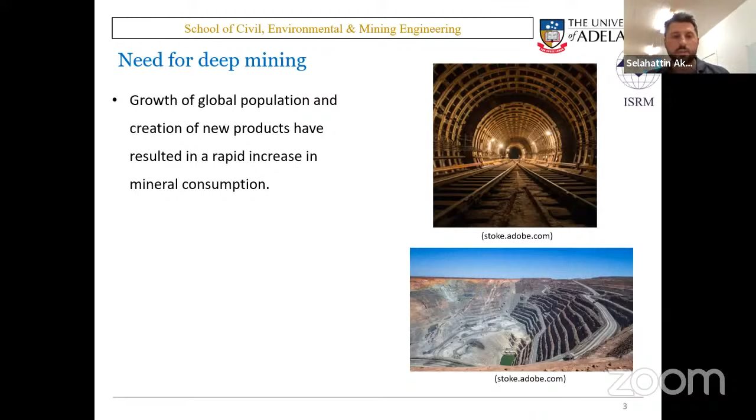First, I would love to give you a brief introduction to the need for deep mining. As we all know, resource consumption is increasing rapidly due to the growth of the global population and new products and markets. This has caused the global demand for minerals to increase exponentially, leading to a decline of ore grades, and consequently mining volumes are progressively increasing, and underground mining continues to progress to greater depths to sustain the supply for the growing demand.

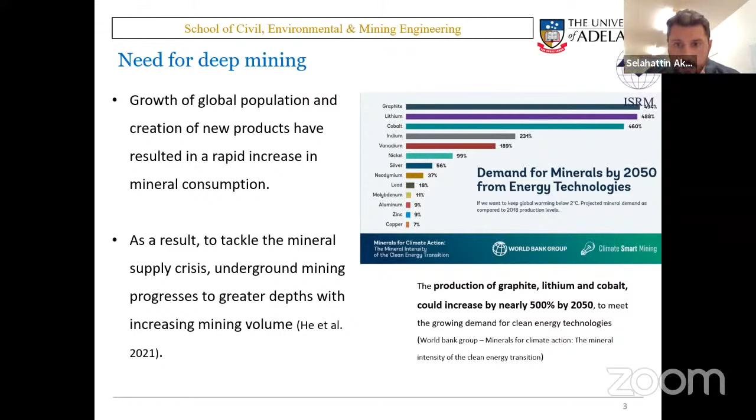Rock burst, which can be considered the cancer of deep rock engineering, can be defined as a large volume of ejected rock fragments caused by the instantaneous release of accumulated excess strain energy from highly stressed surrounding rocks in deep underground or highly buried excavations.

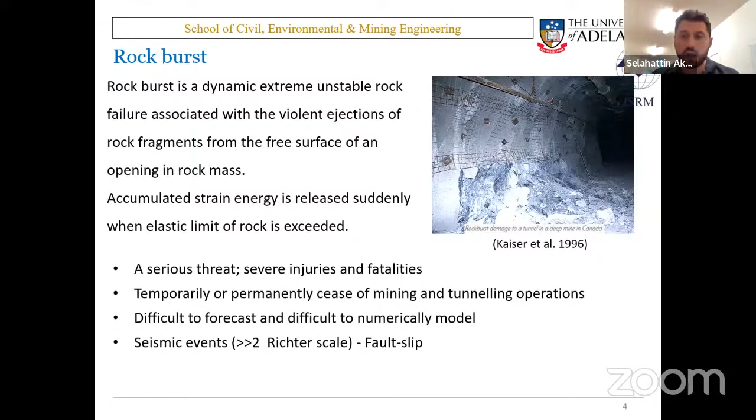This phenomenon causes significant risk in underground operations and could potentially lead to personal casualties and equipment damage, and could also lead to some delay in excavation operations. It could also trigger microseismic events of magnitude more than 2 on the Richter scale. So it's been one of the most serious and yet least understood problems in deep mining and tunneling operations.

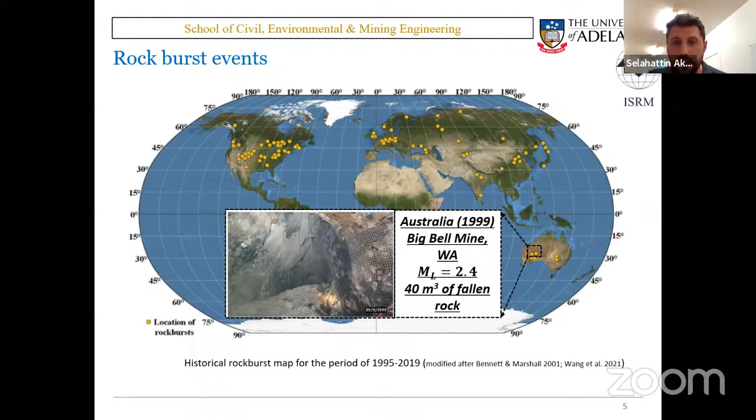Rock bursts have been occurring worldwide, and numerous rock burst events have been recorded in the past decade. Here's an example from WA in Australia: in 1999, in one of the gold mines in WA, a rock burst occurred, and 40 cubic meters of rock had fallen during that incident, along with a quite large microseismic event.

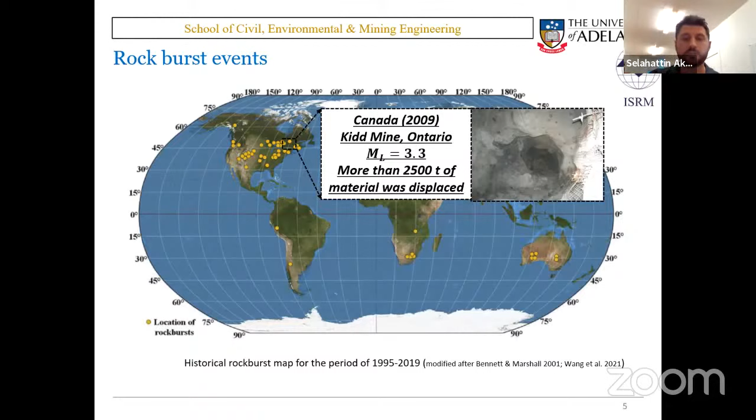Another example from Canada in 2009, from a copper and zinc mine in Ontario, where another seismic event got triggered by the rock burst, and more than 2,500 tons of material was displaced. Another example from a coal mine in China, where a huge amount of energy was released during the burst, and unfortunately 5 casualties happened by the end of this accident.

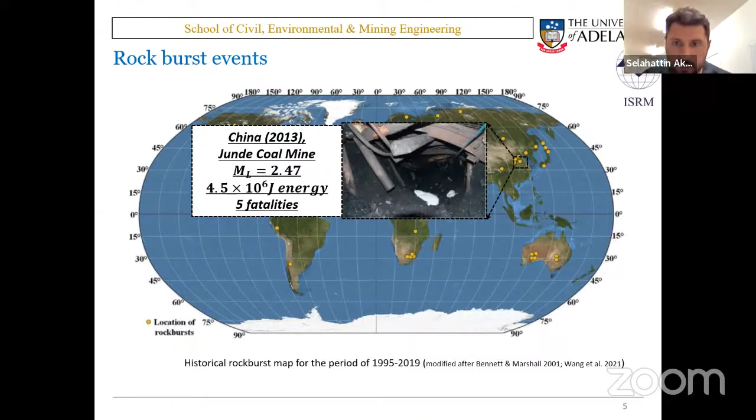Just to visualize how a rock burst occurs in underground or highly stressed mining excavations or highly buried tunnels, I would like to show you two short videos of rock bursts. It might be quite loud.

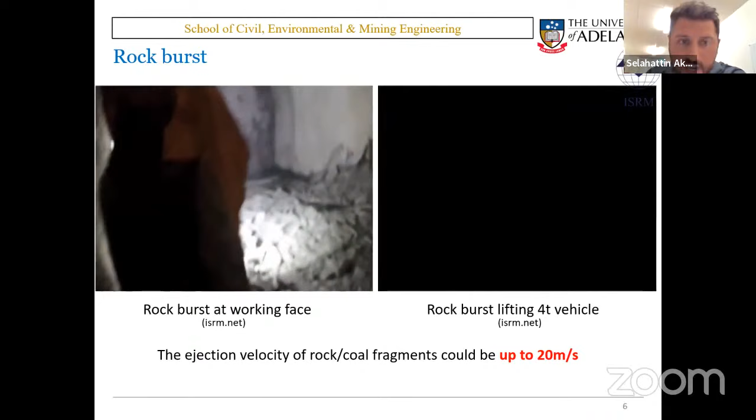As you can see from a working face, the rock fragments ejected from the working face instantaneously at a certain speed, which, to be honest, looks quite scary. Another example from a working face in an underground tunnel: the workers were not aware of what was going to happen, and it ended up lifting a very heavy vehicle in the tunnel, but luckily no casualties happened in that one.

Rock bursts are quite dangerous dynamic incidents, and the ejection velocity of the fragments from the free face, from the working face or sidewalls, could go up to 20 meters per second. So the underlying mechanism of it should be understood very well.

So far, lots of studies have been carried out in the physical simulation of rock bursts in laboratories by replicating the phenomenon under uniaxial and triaxial loading or unloading conditions, and a substantial understanding of rock burst behavior has been gained through these studies, as well as field observations.

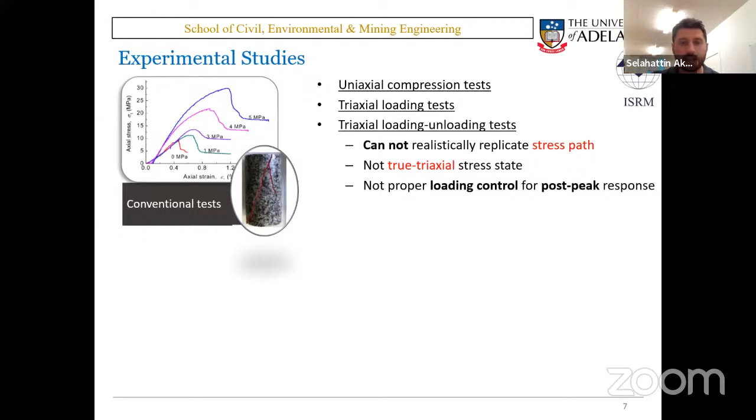However, there are still some outstanding issues that need to be addressed and clarified in the mechanics of rock bursts. The excavation of deep high stress rock masses will inevitably cause unloading, affecting the mechanical properties and energy storage characteristics of the rock. Therefore, excavation unloading is an essential factor to study in rock bursts in deep underground engineering.

For this, some big, expensive true-triaxial rock burst testing frames have been developed in the last decade, replicating the stress paths in an underground excavation by introducing a sudden release of the minimum principal stress, mimicking a free face or an excavation underground.

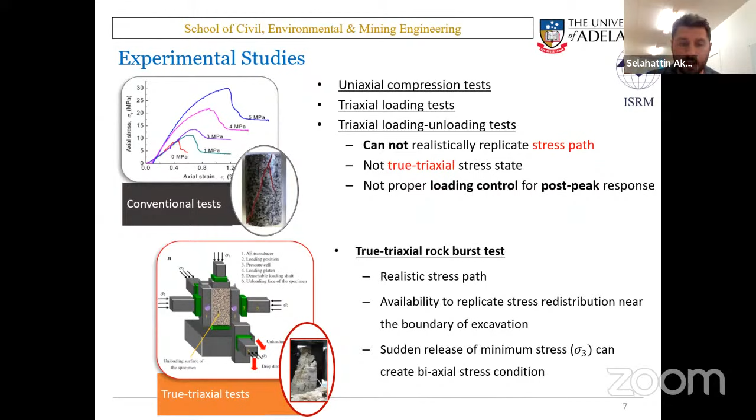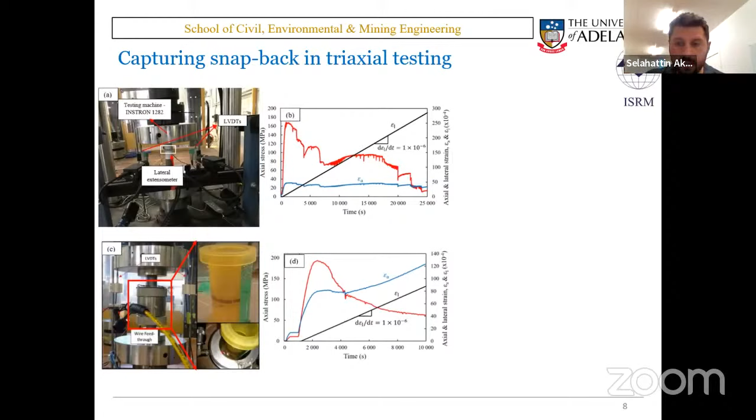In order to better understand and determine the excess strain energy characteristics, which can be defined as the potential energy for rock burst, here in Adelaide we have conducted a series of lateral strain control uniaxial and triaxial compression tests, and the snapback behavior of thermally treated granite samples has been obtained by these tests.

According to the results, a delay in the bursting was observed at higher temperatures, and the samples also tended to burst in a more intense manner as a result of the thermally induced microfractures.

Confinement has also been observed to have a significant influence on the post-peak energy characteristics, so more severe bursting was observed with increasing confining pressures.

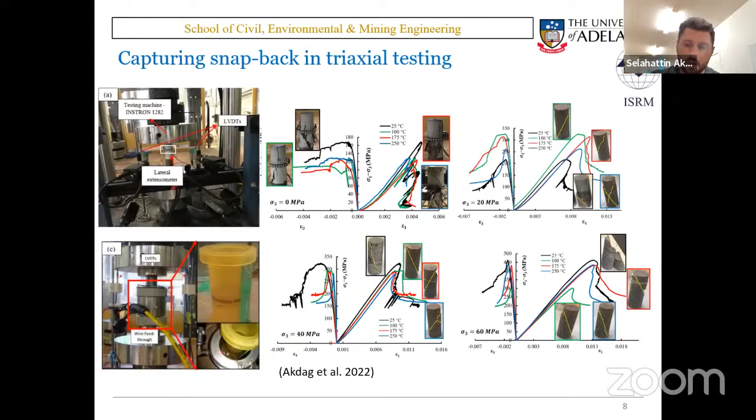For rock burst, a prerequisite is that excess strain energy exists to eject material fragments after failure. So when the elastic strain energy in the rock exceeds the rock's storage capacity, a certain amount of energy mainly dissipates by rock fracturing, and the remaining part of energy is mainly used as kinetic energy of the rock fragments during bursting.

In other words, rock fracture may not be able to dissipate the entire potential strain energy, and a portion of it is transferred into kinetic energy to eject the rock fragments, which leads to the occurrence of rock burst.

So we have done some energy analysis after those tests and determined the excess strain energies. This is important because in order to eliminate rock ejection underground, it is really required that the energy absorption of the dynamic support system used in tunnels or mining excavations must be greater than the excess strain energy of the rock.

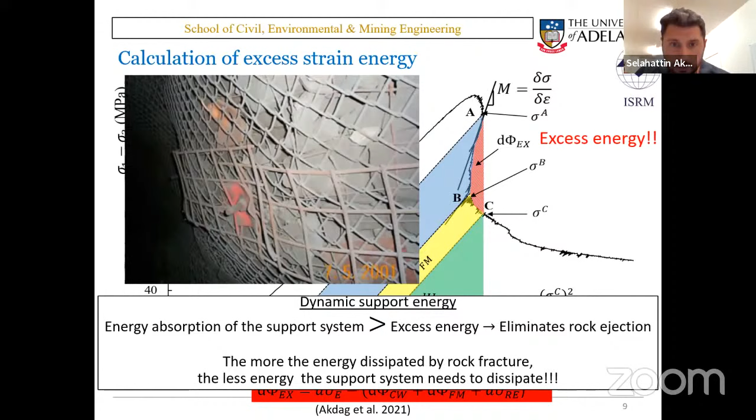This work was conducted in 2018, and we used the true-triaxial loading bursting testing system there to do some rock burst tests using granite.

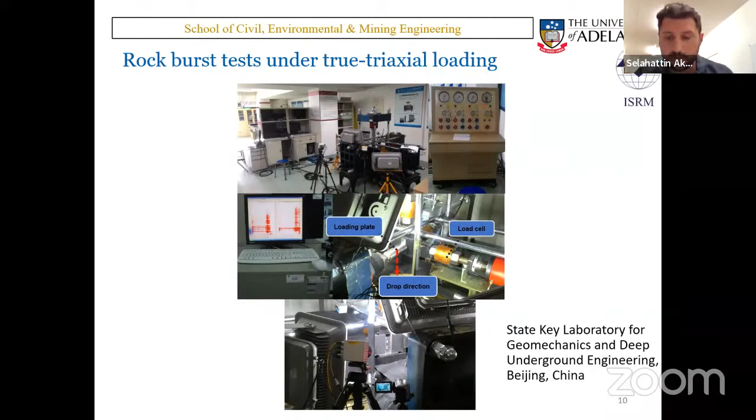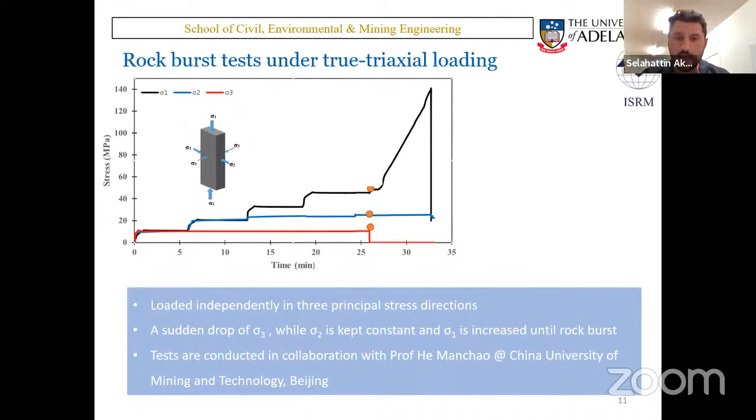To illustrate how the test happens in such a big testing frame: a rectangular sample is loaded independently in three principal stress directions up to a predetermined in-situ stress level. When that stress level is reached, the loading in the minor principal stress direction is dropped, creating a free surface on the sample, while keeping the intermediate principal stress constant and increasing the major principal stress until bursting occurs.

These tests were conducted in collaboration with Professor He Manchao, who is a very well-known rock burst expert in the rock mechanics area. Here's an example of the ejecting fragments from the free face of a rectangular sample.

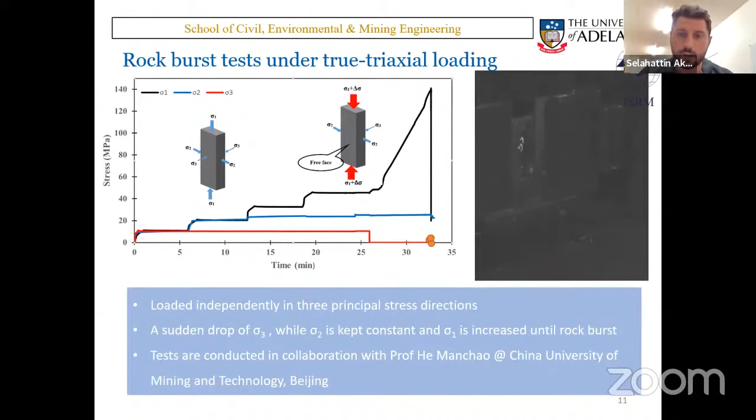As you can see, it started with small grains ejecting from the free face with increasing axial load, and it failed after the capacity was exceeded.

Using this testing frame, we studied the thermal damage influence on bursting mechanism under true-triaxial loading and unloading conditions. Based on the stress level and the kinetic energy calculated via high-speed cameras and the acoustic emission responses and their characteristics, the damage state of bursting was identified both qualitatively and quantitatively.

This is an example of capturing the ejecting fragments from the free face.

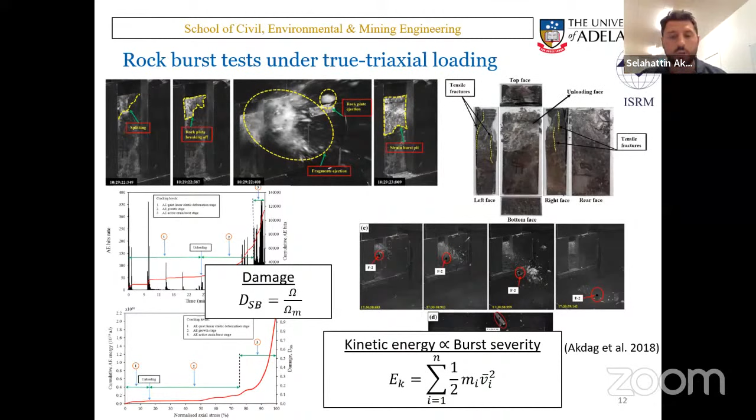In this study, some bursting indicators have also been proposed to evaluate the degradation of the rock and the bursting processes, and the bursting severity was quantified by the kinetic energy of the ejected rock fragments.

As an alternative to these big expensive testing frames, here in Adelaide we have proposed a burst testing methodology using hollow cylinder samples. In this methodology, we could also mimic the stress states in an underground excavation by applying internal confinement, external confinement, and axial loading, which enables us to replicate the three principal stress states.

In order to verify this, we used acoustic emission responses during these true-triaxial tests using hollow cylinders as well. We tracked the deformation and bursting processes during the tests, and to verify the acoustic emission responses we implemented a borescope to confirm the results during the tests.

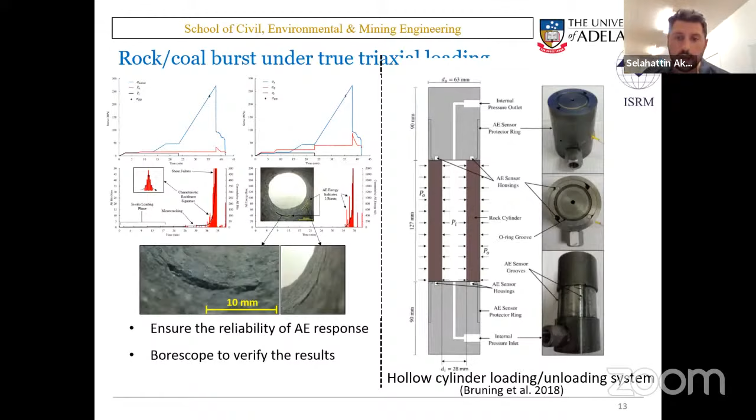During the test we can observe bursting, which relates to the acoustic emission response and follows the force-displacement response at the same instant.

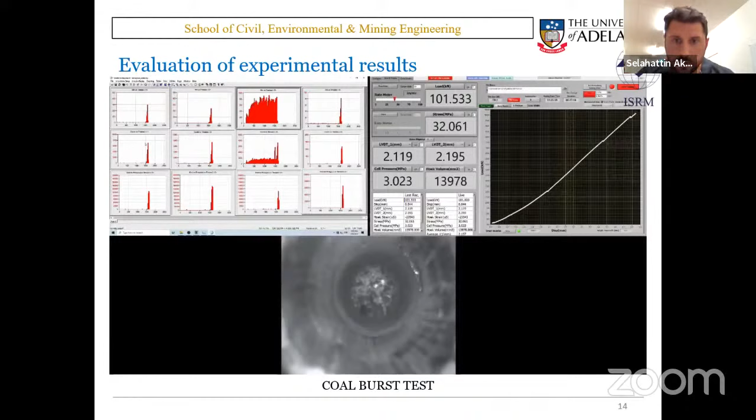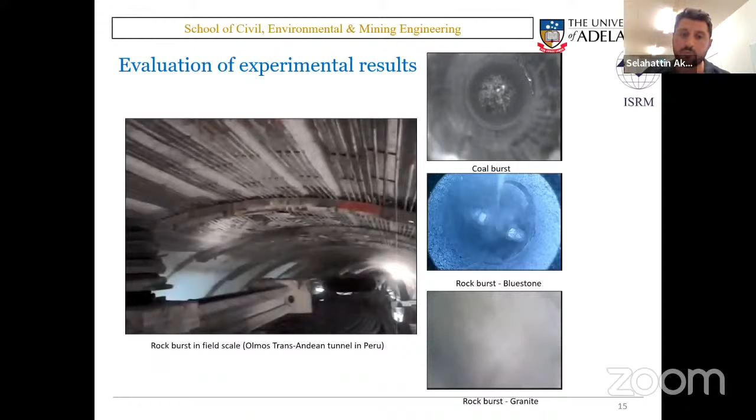A bursting happened here, and now the granite is bursting. We can observe the crack generation and propagation in the hollow samples and the bursting at the same time, showing that this bursting phenomenon can be replicated in the laboratory as well.

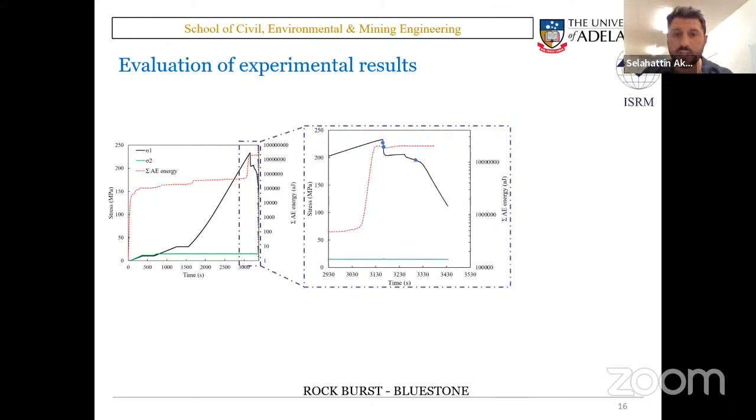As an example of bursting in bluestone, we obtained the stress-strain behavior and also the acoustic emission responses to detect any kind of deformation and the evolution of the failure and bursting.

The evolution of rock burst showed local grain ejection from the sidewalls of the hollow cylinder, followed by fragment exfoliation accompanied by crack generation and propagation, and eventually bursting occurred when we increased the major principal stress level.

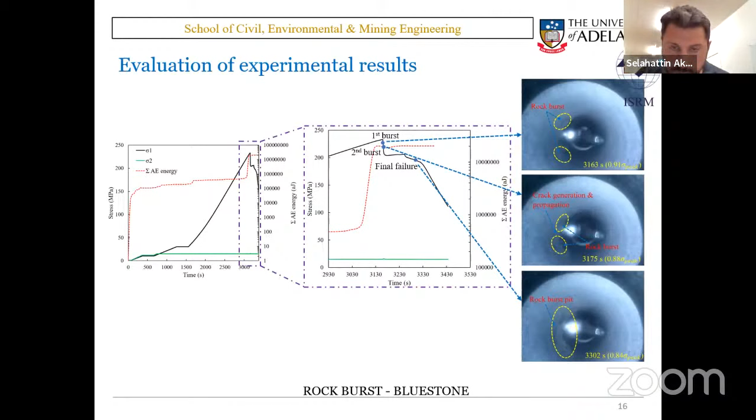So in order to quantify the damage, we have also conducted some micro CT scanning before and after each bursting test to provide a non-destructive 3D imaging of the fracture evolution and fracture network during bursting. So a stack of 2D X-ray images was reconstructed to produce a realistic 3D virtual volume, where each voxel represents the X-ray absorption at that point.

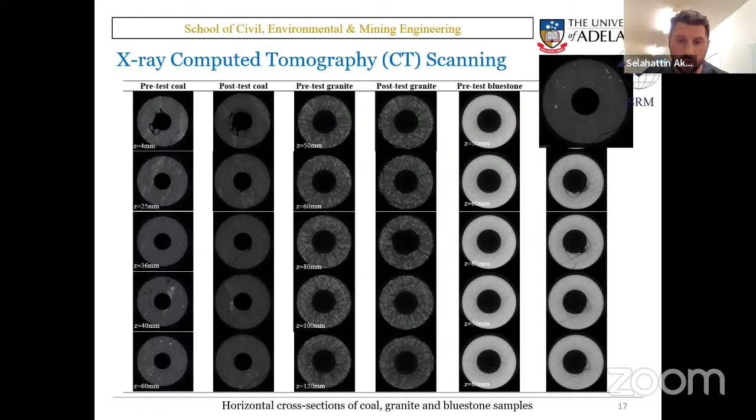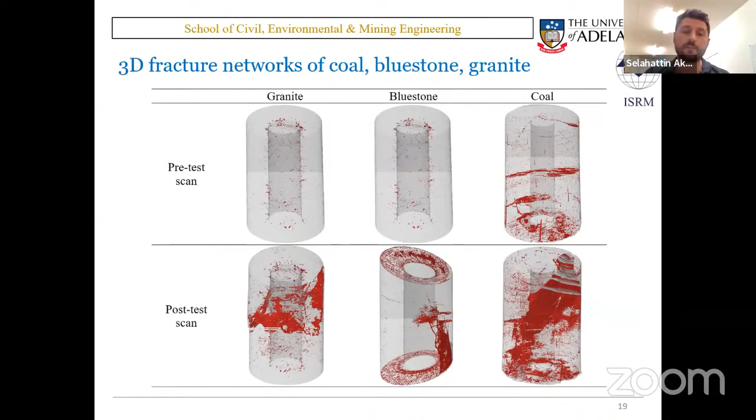Using the 2D stacks of images, we have reconstructed the 3D networks of the fractures during the bursting tests.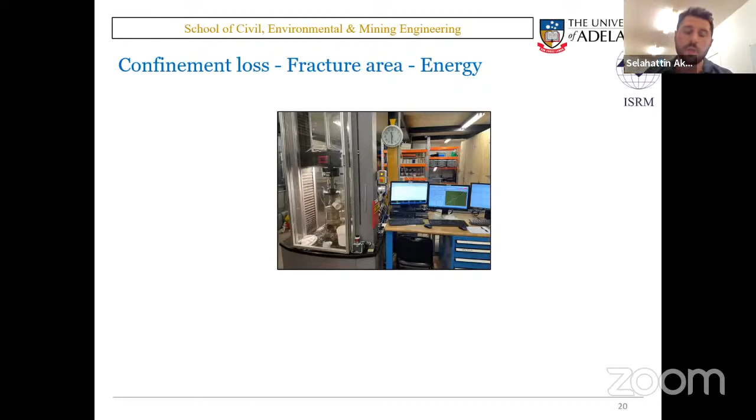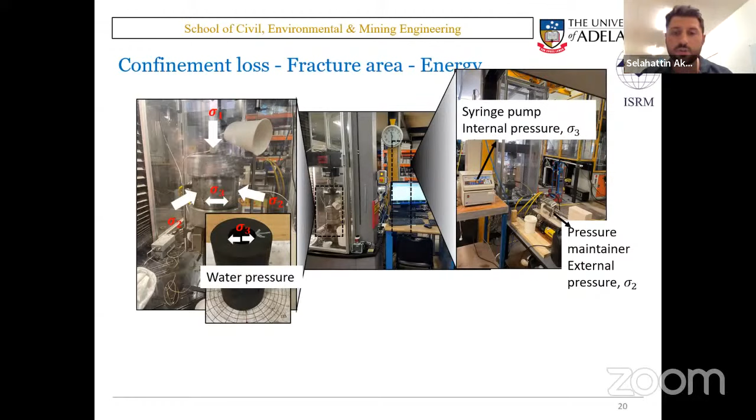We have also studied the influence of confinement level on bursting. In this case, a hoek cell is used for the external confinement, and water pressure is applied as an internal confinement using a syringe pump, with an MTS compression machine used for the axial loading to apply true-triaxial loading and unloading conditions.

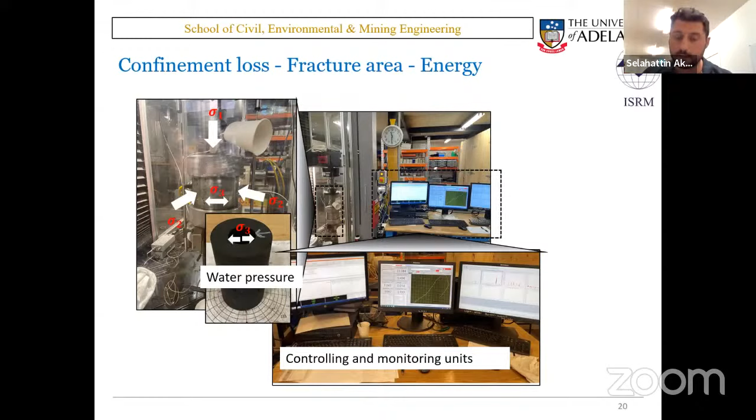In the meantime, during tests, we monitored the failure process using acoustic emission and force-displacement behaviors. Based on that, we released the confinement by removing the internal pressure from the hollow cylinder using the syringe pump. So we replicated an excavation in the laboratory by releasing the internal pressure in a hollow cylinder.

Here's an example of the bursting pits on a hollow sample. We then did micro CT scanning to determine the fracture surface area of these samples generated during bursting. Because we know the fracture energy of the sample, using the fracture area generated, we can calculate dissipated energy during fracture.

This happens by generating new fractures and also expanding the pre-existing fractures during bursting. We can also determine the kinetic energy dissipated rather than the fracturing mechanism during bursting, which is directly related to the bursting severity.

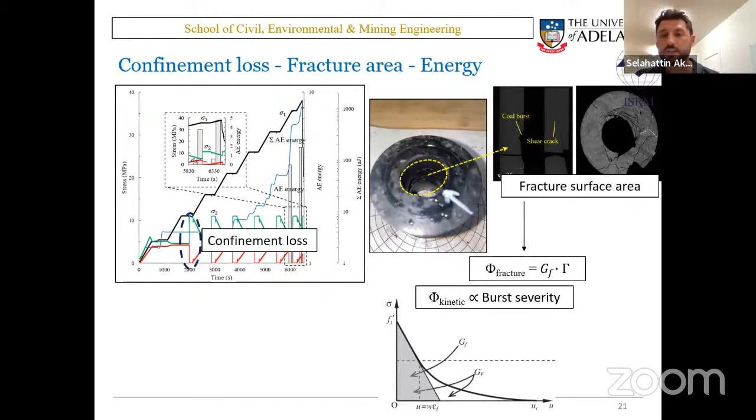We've also worked to understand, because the initiation of bursting is a quasi-static fracturing, the underlying fracturing mechanism of bursting by doing some fracture toughness tests under various strain rates and also temperature levels.

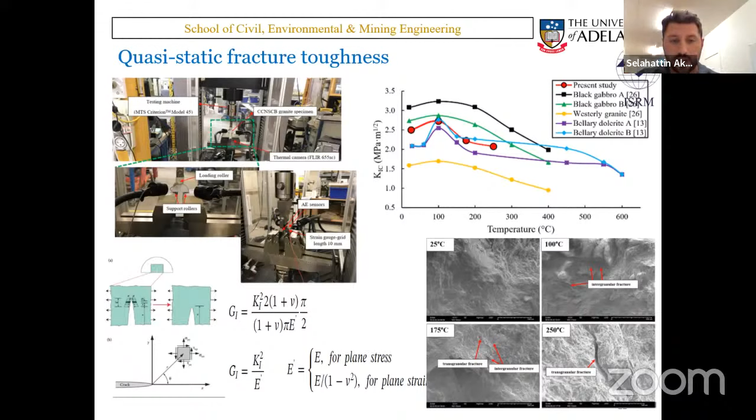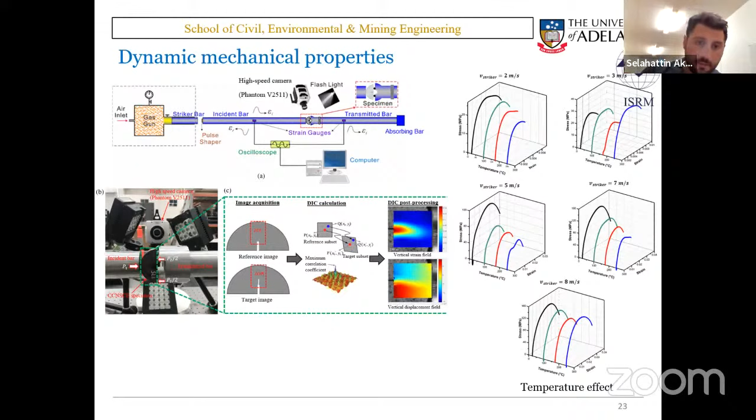Because we've also investigated the dynamic fracturing characteristics of bursting, as it evolves as a dynamic fracturing phenomenon, the effects of thermal damage and impact loads on the dynamic fracturing and energy characteristics have been determined by conducting these dynamic fracture tests using a split Hopkinson pressure bar at Monash University, in collaboration with Jian Zhao, who is a very well-known expert in dynamic fracturing.

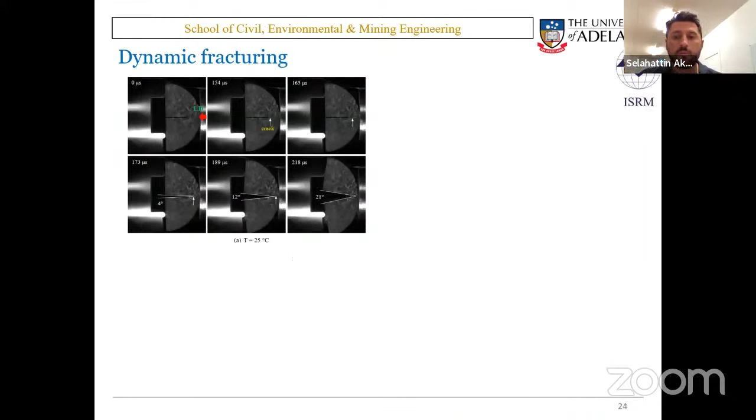With the help of a high-speed camera and DIC technique, virtual extensometers were designed, and displacement as well as strain fields have been obtained, and also crack propagation velocities were estimated using these, which are also used for dynamic fracture energy calculations.

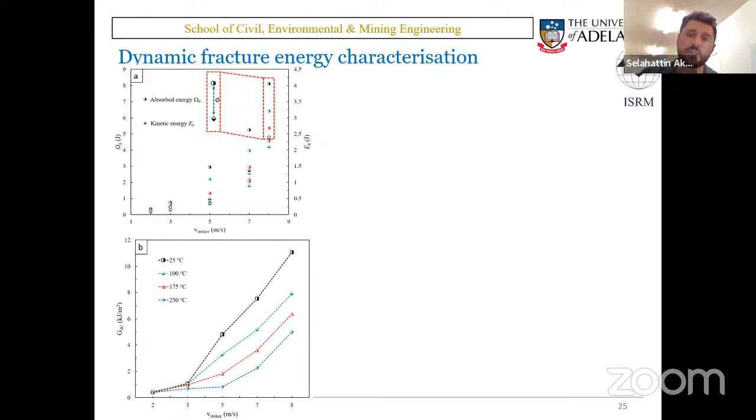The dynamic energy evolution characteristics have been determined and used to evaluate the bursting severity of granite under different impact loads. The bursting severity was determined based on the speed of the flying fragments during the testing.

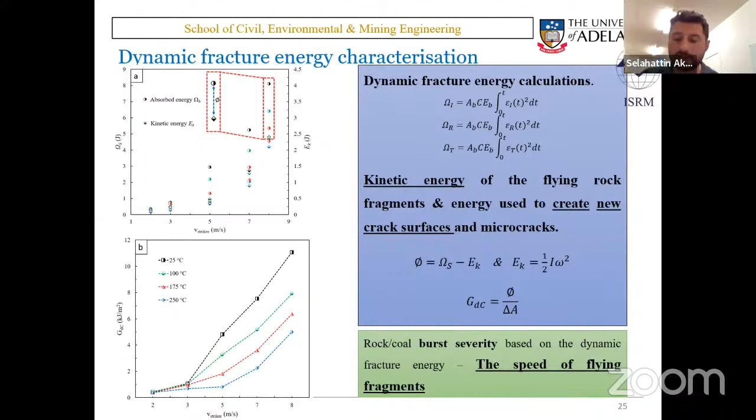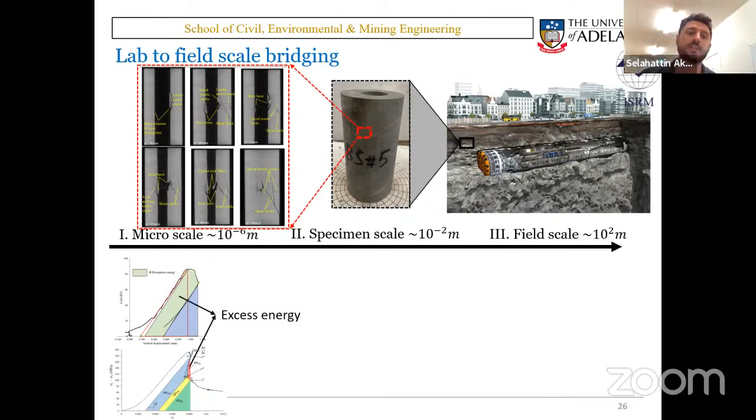It's really important to understand the behavior of the rock in the laboratory, so we can relate that behavior and try to estimate how it would respond in the field. By determining the excess energies and the kinetic energy levels, they can be used for the designs of dynamic rock supporting in underground excavations to eliminate the risk of bursting.

To summarize, in the laboratory, by conducting uniaxial and triaxial testing, we can determine the excess strain energy, which is the potential for bursting, as well as the mechanical properties. And by conducting some true-triaxial testing, we can determine the energy storage levels, kinetic energy levels, and also bursting stress levels based on the three principal stress levels.

The burst-prone depth could also be estimated based on the results of that kind of testing. And we can obtain some insight on the quasi-static and dynamic fracturing by conducting fracture toughness tests, as well as measuring the ejection velocity and the propagation velocity of the fracturing during these tests.

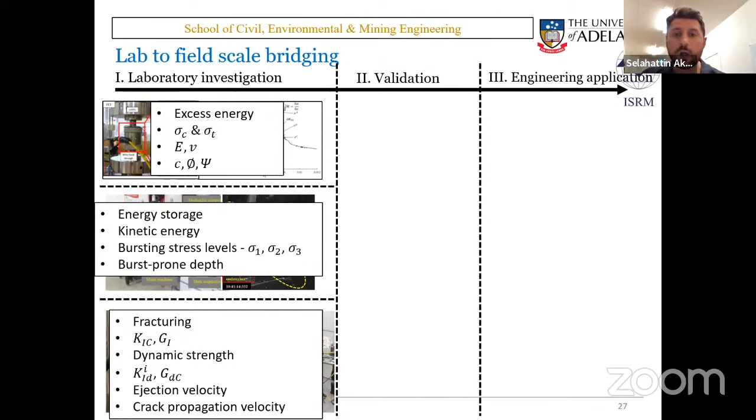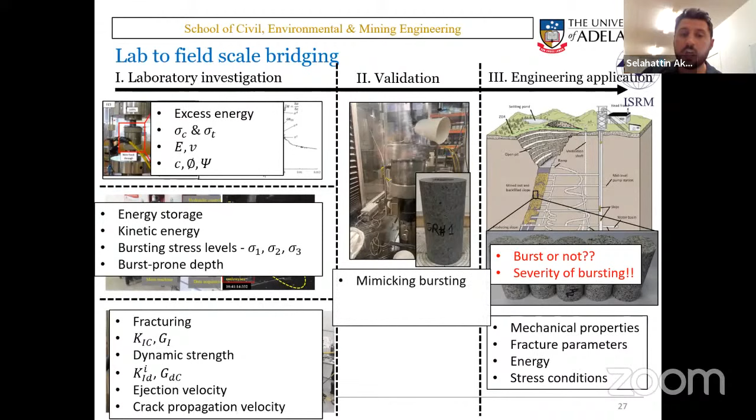So at the end of it, apart from obtaining mechanical properties, fracture parameters and energy levels, and also the stress conditions for bursting, we can determine whether the rock is going to burst or not, and estimate the propensity or severity of the bursting. In order to validate and verify the results, with an advanced true-triaxial loading and unloading setup, we can mimic the bursting in the laboratory and visualize the fracturing in 3D to better understand the behavior in the field.

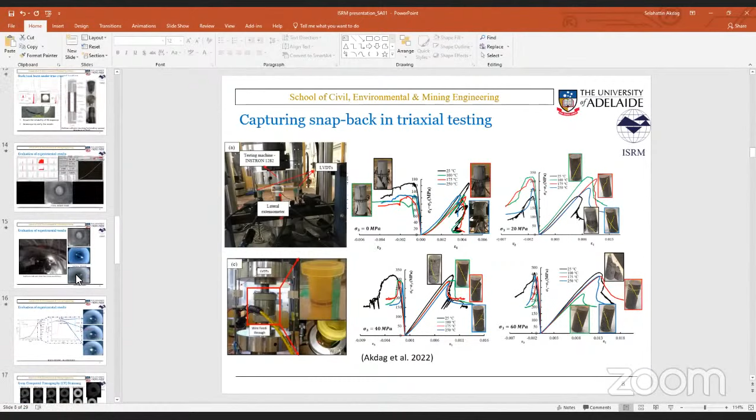There was a paper recently published, I think by Professor Ming Cai, Professor Xia-Ting Feng, and another gentleman, the first author Dr. Hu, I believe, about post-peak stress strain curves, and they very nicely explained the mechanism there. So I was wondering what type of method you use for controlling these tests, axial strain or lateral strain rate control, and how do you find this influencing the results based on your experience, if you tried that? Thank you very much.

Yeah, thank you, Masood, for your great, interesting question. As you said, some researchers use axial strain, displacement or load control, while others use lateral strain control, as we did here in Adelaide.

The main purpose was because we believe that rock behavior, especially brittle rock behavior, the axial strain does not increase at a certain steady behavior. That was the reason we wanted to use lateral expansion as a controlling feedback for the axial load, because the lateral strain, the expansion, increases progressively. We believe this is the real behavior of the rock, and it enables us to do the snapback here, so we can calculate the energy accumulated inside the rock sample, which is the potential of bursting that we propose here.

And so this energy will be released in case of a release of confinement or any free face that can be replicated in the laboratory.

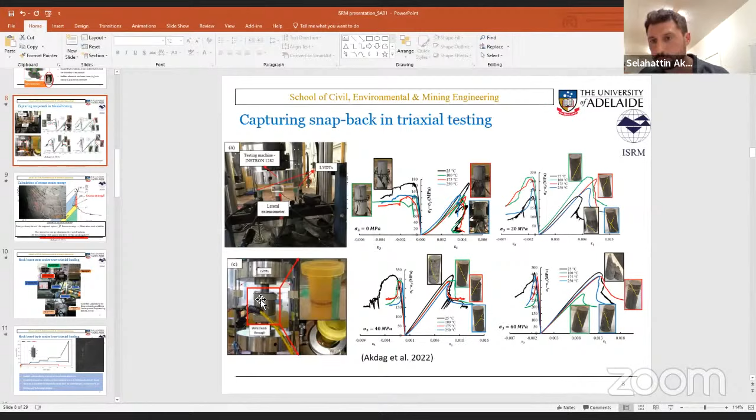Thank you very much. Very, very complete answer. Thank you, I really appreciate that.

So, based on my experience, I saw that on the lateral side we get unloading as well. When the lateral strain rate is high, the actuator moves back, causing unloading. So what we see is not actually class 2, it's just unloading, and you see that on the lateral strain graph as well.

So the behavior of rock is something that is changing in one sense, and in another it's not. It should not change with the way we treat the sample in the laboratory, based on machine rigidity or the way we control the test. It's just the way it responds to how we test it. On the lateral side, I see that we get unloading, and that unloading is elastic, not the plastic deformation or damage kind of deformation we want to see.

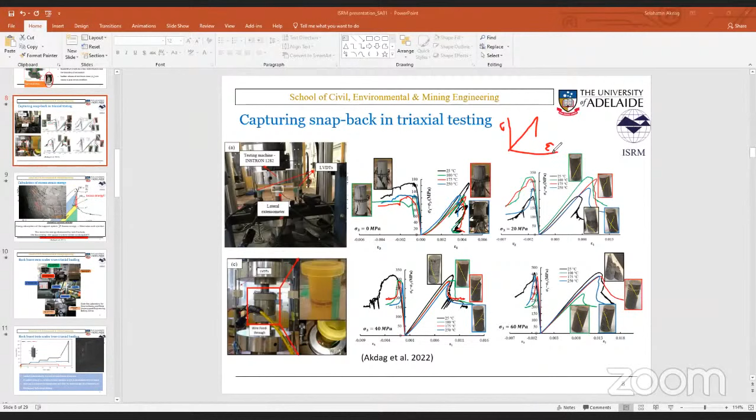If we control it with axial strain, though, we usually tend to get a very sharp release of energy, and there's no kind of kickback in the axial strain curve. That was the actual reason, because in axial loading control, the brittle failure occurs instantaneously and drops here, and that would not enable us to calculate the energy levels in the post-peak regime.

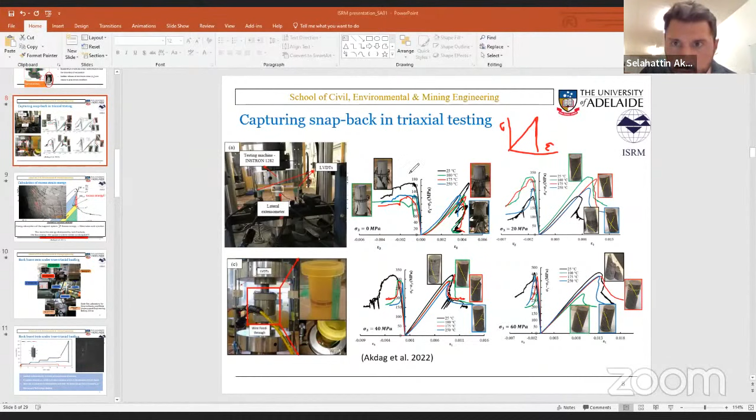So in this case, we are just getting the feedback. The rock itself is controlling this and releasing, as you can see here, in the next slide, which is more clear.

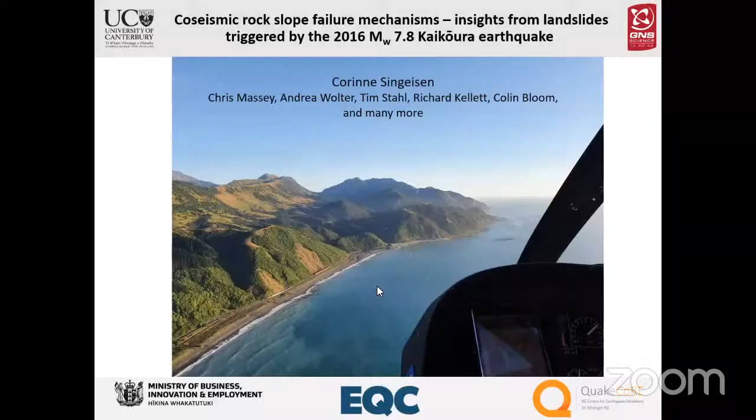Today I'll be talking about co-seismic rock slope failure mechanisms from the 2016 Kaikoura earthquake. The research I'll be presenting is part of my PhD research at the University of Canterbury under the supervision of Chris Massey and Andrea Wolter at GNS Science, and Tim Stahl at the University of Canterbury, as well as in collaboration with numerous other researchers.

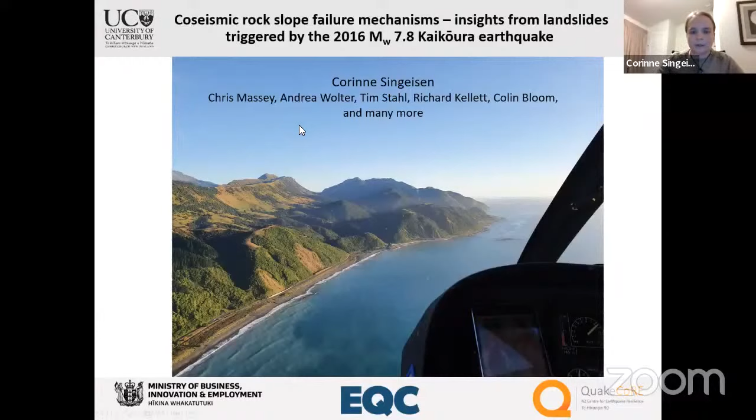First, I'll give an overview of the 2016 Kaikoura earthquake. Then I'll talk about co-seismic rock slope failure mechanisms, and then in more detail about site-specific analysis of two co-seismic landslides we studied. After that, I'll talk about the conceptual models of failure mechanisms derived from this site-specific analysis, and finally discuss implications for landslide susceptibility.

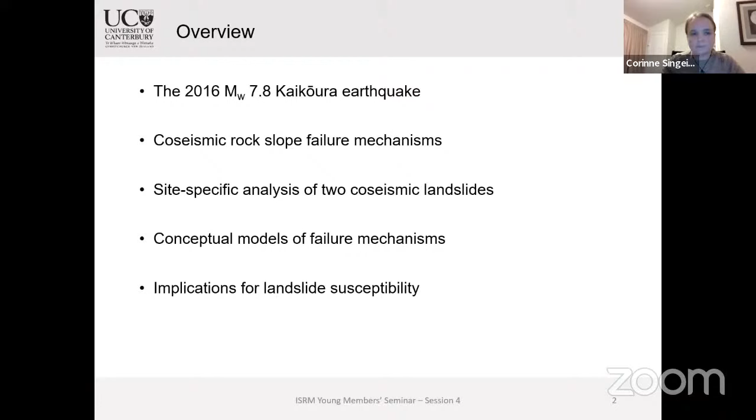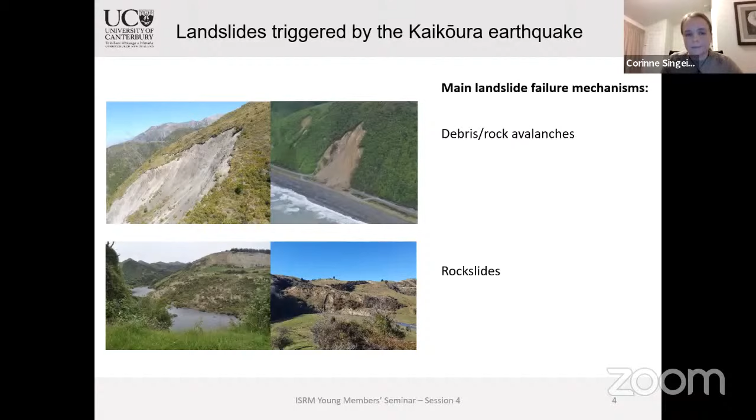So why do we care about failure mechanisms? There's an intrinsic link between failure mechanisms and initiation processes. You can imagine that a debris avalanche doesn't quite initiate in the same way as a rock slide does. That has implications for landslide susceptibility when we're interested in which parts of the landscape are more susceptible to co-seismic failures than others.

Also, failure mechanisms influence the potential hazard and risk that a landslide poses to infrastructure and human life. So we're ultimately interested in learning more about failure mechanisms in order to better mitigate the risk that earthquake-induced landslides pose to society.

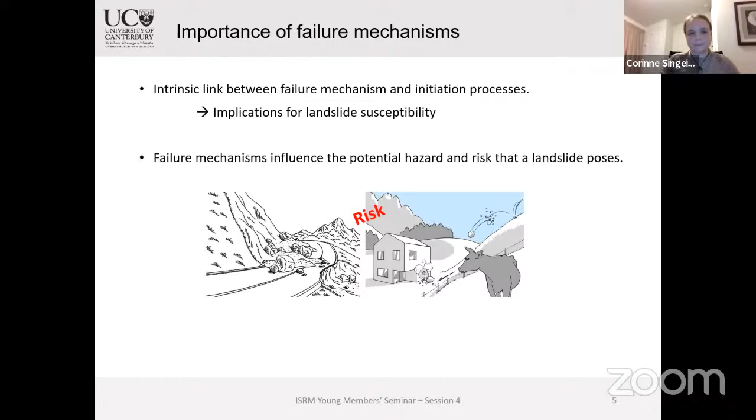I'll be talking about mainly two landslide sites today. Those are located in the south of the study area, called the Mount Peter South landslide and the Stanton River East landslide. Mount Peter South is located in these Torlesse basement rocks, and Stanton River East is located in Neogene siltstone.

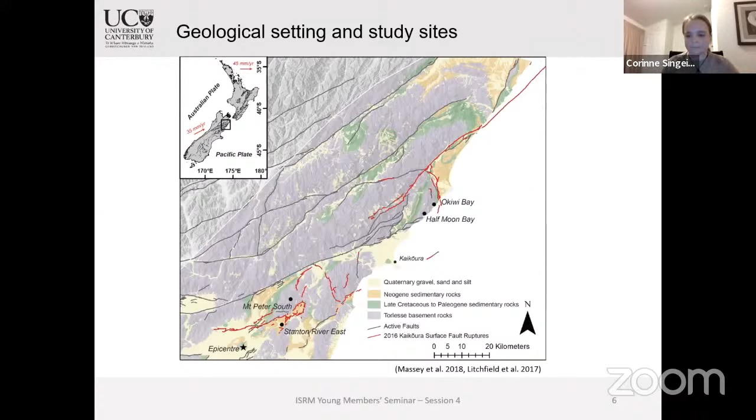These rocks are heavily deformed and characterized by closely spaced discontinuities. In this type of rock mass, we see discontinuities from the centimeter scale up to the meter and decameter scale. Regionally, after the earthquake, we saw that the main failure types in this type of rock were rockfalls, as well as debris and rock avalanches.

On the other hand, in Neogene sedimentary rocks, which are typically massive but very weak rocks with an intact rock strength of lower than 2 megapascals, we mostly saw rock slides, slumps, and some shallow debris flows.

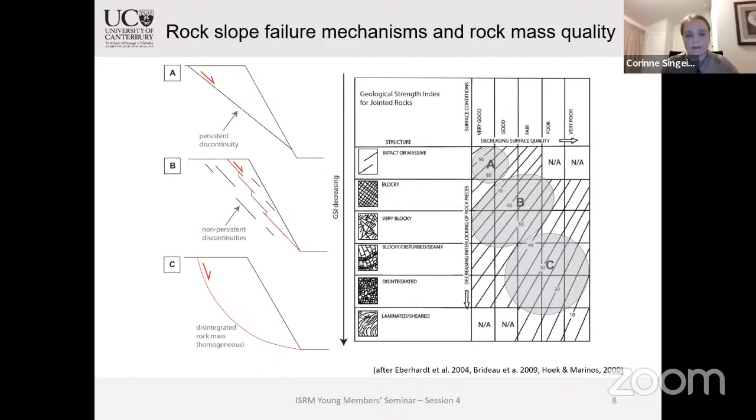To understand the failure mechanisms in our study area a bit better, we conducted some site-specific analysis on a few selected landslides. As input, we used pre and post earthquake aerial photographs and topographic data, and we also did some field work.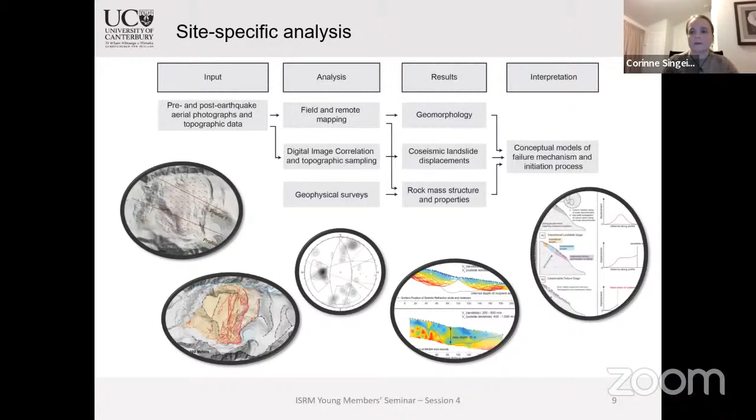Based on that, we derived results regarding the geomorphology, co-seismic landslide displacements, as well as rock mass properties and the structures of the rock mass around those landslides. We then compiled all of this information into conceptual models of individual sites, and also derived more overarching models for failure mechanisms in these rock types. Based on that, we were also able to derive some hypotheses around initiation processes of these specific failure mechanisms.

The first site I'll be presenting is the landslide site in Torlesse Greywacke, the Mount Peter South site that I showed you on the map before. As you can see in picture A here, this is a partial failure as a rock avalanche. The upper part of the slope is an incipient failure, and the lower part of the slope has transitioned into a debris or rock avalanche.

In the incipient portion of the slope, we can detect some deformation features. This is quite a cool opportunity we get here, that we can actually still see how the slope deformed during the earthquake, because in many other failures we just see the debris or rock avalanche deposits and don't get to see any deformation features in the slope that led up to the failure.

In the upper part of this incipient portion of the failure, we see translational movement. There are a few tension cracks around there, but not much deformation. So it's mainly translational deformation of the upper part of the slope just below the headscarp.

In the central part of the slope, indicated with the blue color in panel B, we can see some compressional geomorphological features like counterscarps and bulging. Then in the lower part of the incipient landslide, in this purple area, there's a lot of tension cracks. We think this is the area where the landslide started extending and actually started sliding, then transitioned into the debris avalanche that caused the disruption of the ground, where we can just see some debris in the landscape now.

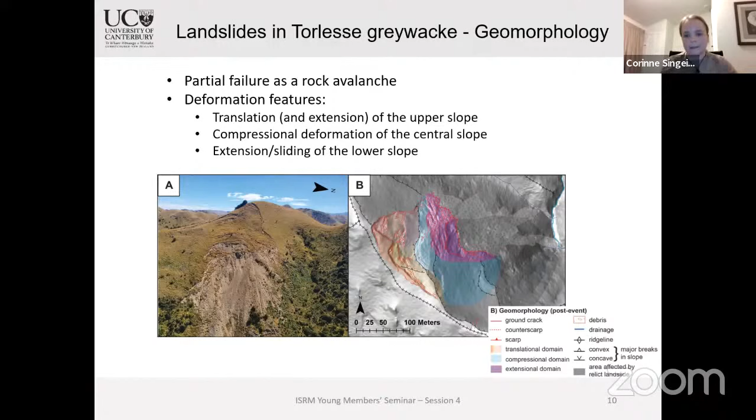We also carried out some digital image correlation analyses using pre and post earthquake aerial imagery. As you can see in these figures, the average displacement of the incipient part of the landslide is about 6.4 meters.

In the area of profile 1, the displacement magnitudes below the headscarp stay relatively constant before you get into the disrupted part with many tension cracks where we can't measure the displacement anymore. In the area of profile 2, we get an increase and then decrease of displacement magnitudes. That's the part of the slope that is a bit less steep and also hasn't transitioned into a debris avalanche.

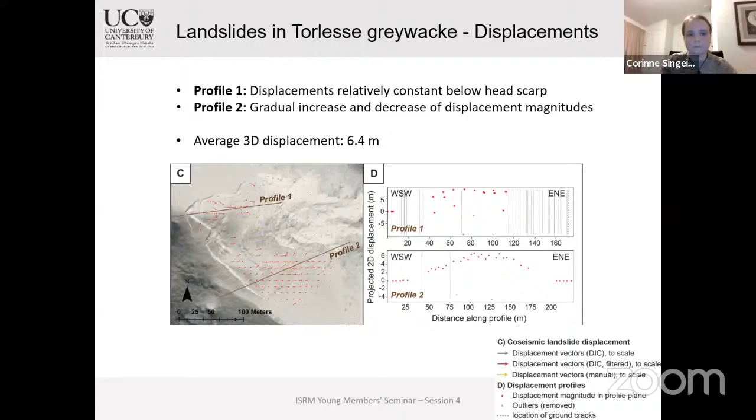We also took some structural measurements in the area, and based on that, we can say there's no large-scale persistent discontinuities that could explain the failure. But there is a pretty dominant discontinuity set that we saw exposed in the headscarp, which dips at about 50 degrees out of the slope.

Based on that, and information from geophysics telling us the landslide is relatively shallow, we derived that this failure has to be a step path failure, where it starts failing along some of these meter-scale discontinuities along this 50-degree dipping joint set, but then steps through any other small-scale discontinuities it can find. Because this rock mass is so closely jointed, there's no need to actually break intact rock to create a step path failure.

So we call this type of failure in Torlesse Greywacke a joint step path failure. We divided the failure mechanism into three different stages. The incipient landslide stage is where you get rupture initiation along these more dominant defects, and then step path propagation of the failure surface along small-scale discontinuities. The upper part of the slope, which shows relatively little internal deformation, is in this stage actively compressionally deforming the lower part of the slope.

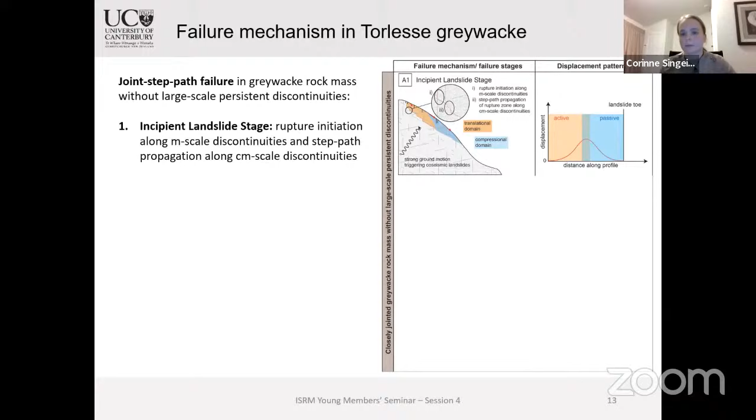Then in the second stage, once the failure surface has propagated all the way through the slope, you get extension and transition to sliding in the lower part of the slope, which then leads into the third and final stage of debris and rock avalanching.

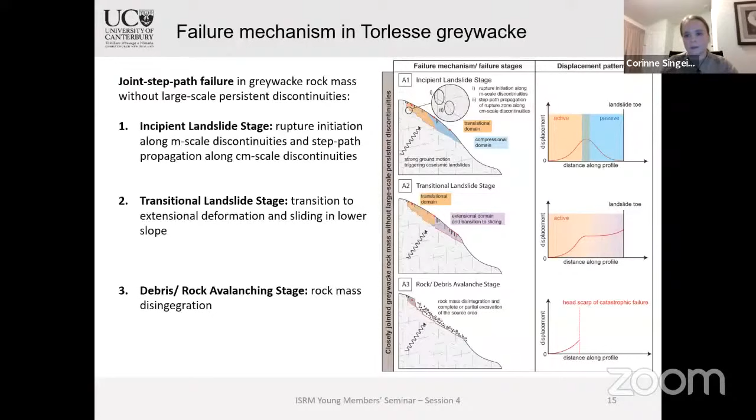On the other hand, landslides in neogene siltstone are quite a bit simpler and more easy to figure out. This is the example of the Stanton River East landslide.

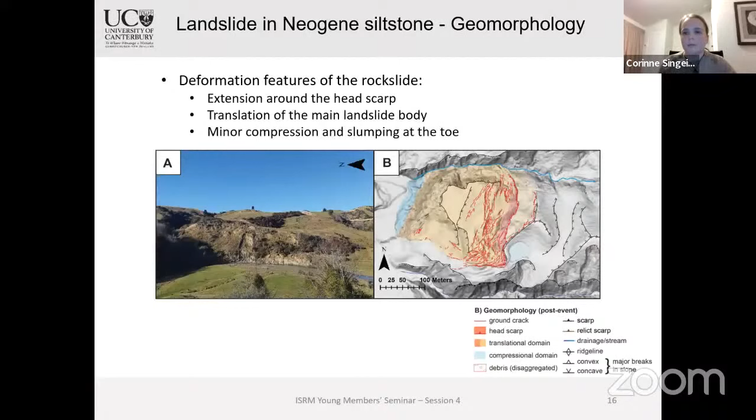You can see on the geomorphology map on the right-hand side that there are some tension cracks around the headscarp, but the main landslide body actually moves as a coherent block. That also becomes apparent in the results of the digital image correlation.

On the left-hand side, these red vectors show the coseismic landslide displacement vectors, and you can see that they're quite coherent. In the profiles, you can also see this big step of displacement magnitude between the intact ground, the headscarp, and then the landslide, but not much else going on.

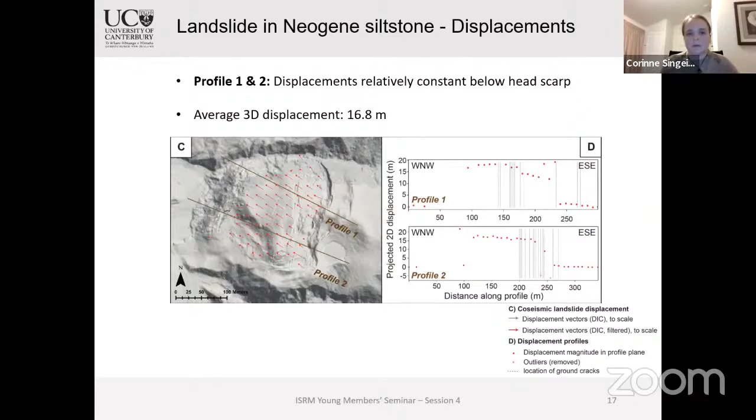If we then project the regional bedding orientation into the slope, we also see that the landslide vectors actually dip parallel to bedding. This confirms the hypothesis that this landslide moved as a planar translational rock slide following bedding.

So this is a pretty traditional planar sliding along a persistent discontinuity that is described many times in the literature on rock slides, and kind of confirms this initial finding that with persistent discontinuities, you expect structurally controlled failures.

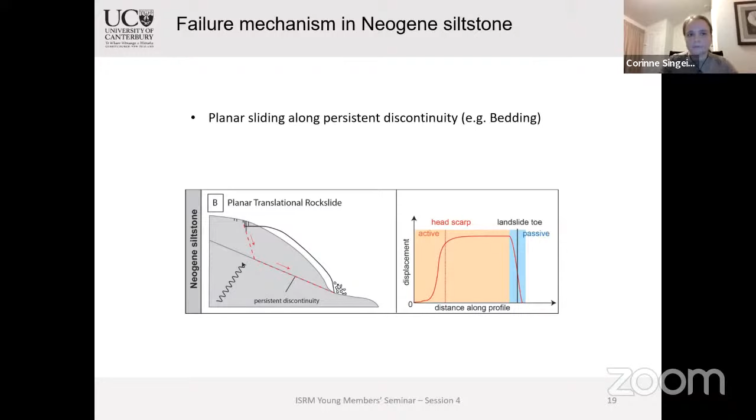If we bring all of these results back together, we can start thinking about what this means in terms of landslide susceptibility. So in Torlesse Greywacke, because we think the rupture initiates along some of these meter-scale discontinuities, the orientation of these discontinuities could play a role in where these failures occur.

Then, of course, slope angle and rock mass strength determine whether a slope is susceptible to failure or not. Additionally, because we think these failures initiate from the top of the slope and are driven from the upper part, it is possible that they're disproportionately affected by processes affecting mostly the upper part of the slope, such as amplification due to seismic shaking, which is typically much higher at the top of the slope compared to the toe.

In neogene siltstone, on the other hand, the susceptibility factors are mainly related to the strength and stress conditions along those basal sliding planes that allow the landslide to occur. That includes bedding orientation relative to slope, as well as strength of the bedding plane and pore pressure along the basal sliding plane.

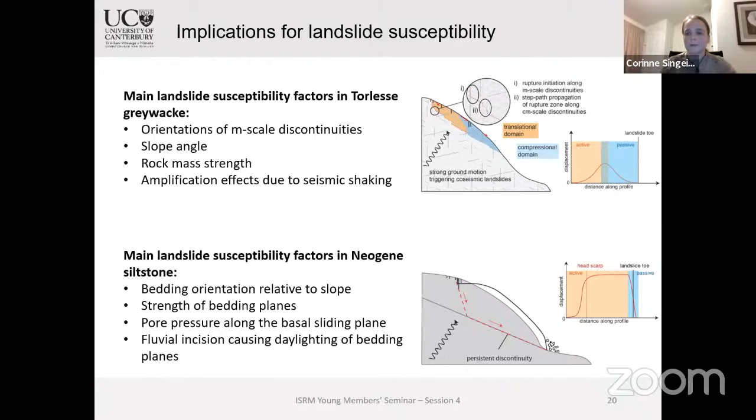Fluvial incision could also influence the depth of these failures, as well as influence susceptibility, because it influences whether the susceptible bedding planes are daylighting or not. This has also been found in a few other landslides around New Zealand, where regional studies were done on the susceptibility of landslides in neogene siltstone, so it ties in quite nicely with other work that has been done.

We've written some of these findings up in a paper that is currently in review. We also include an additional site-specific analysis in the paper, so if you're interested, once it's published, I encourage you to go check it out.

Furthermore, I'm also still working on trying to validate these empirical hypotheses with some numerical modeling techniques. We're also interested in putting some numbers to the transition of the failure stages that I described for Torlesse Greywacke, to help us better predict the hazards that some of these slopes pose on infrastructure.

And then finally, I'm also interested in looking into how these landslides evolve over multiple earthquake cycles, because New Zealand is a very tectonically active landscape. As you've seen, some of these landslides are still incipient, so they might fail in a future earthquake. It would be really interesting to see how they evolve over multiple earthquake cycles, which could inform future forecast models and be useful for forecasting where future landslides might occur.

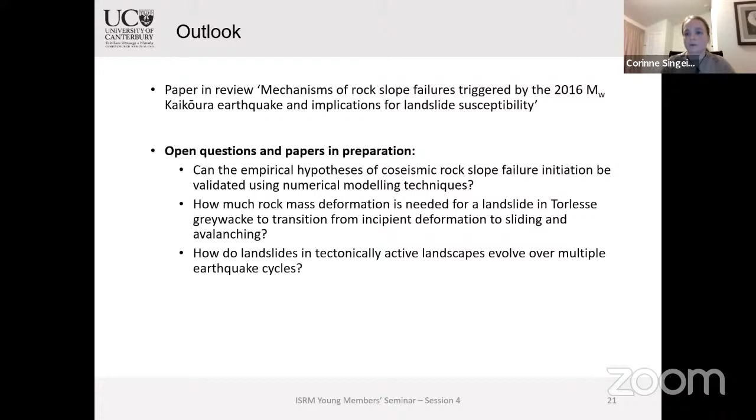So I hope I convinced you that failure mechanisms matter and are interesting to study, and I'm happy to take any questions that you might have. Thank you.